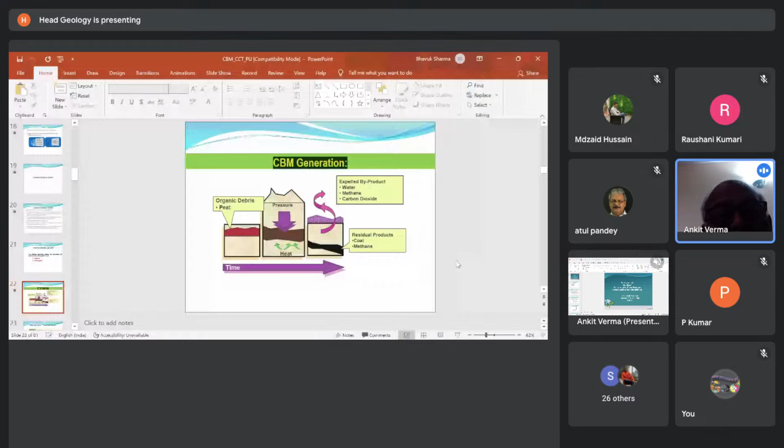There are two processes which control the generation of methane: one is biogenic and the other is thermogenic. The biogenic process involves organic debris, and with heat, pressure, and temperature, the methane is generated and trapped.

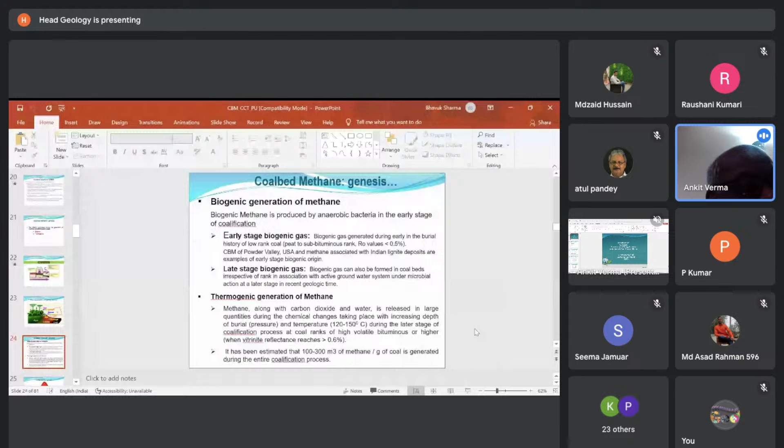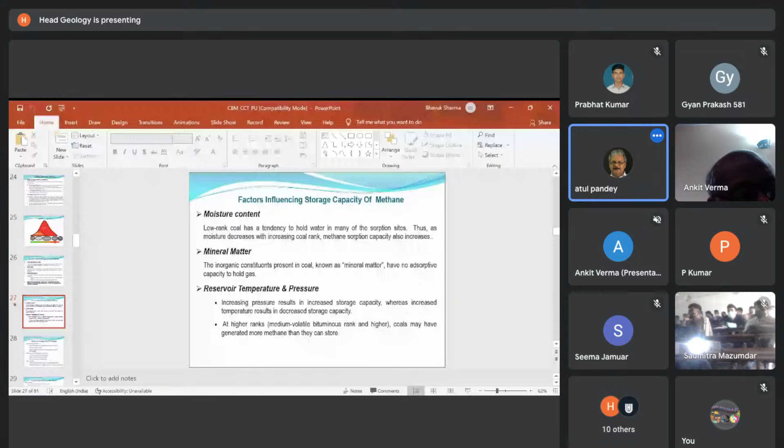The geological parameters important for parametric evaluation of a CBM project: the coal seams must have greater thickness, adequate depth of burial, lower degree of tectonic activity, and the chemical and petrographic parameters are also important. It must be low moisture and low ash coal, high carbon percentage, vitrinite rich, and the rank should be medium volatile bituminous to low volatile bituminous.

When we do the parametric evaluation, we measure the gas content. There is a specific process to measure the gas content, to know the actual quantum of gas present.

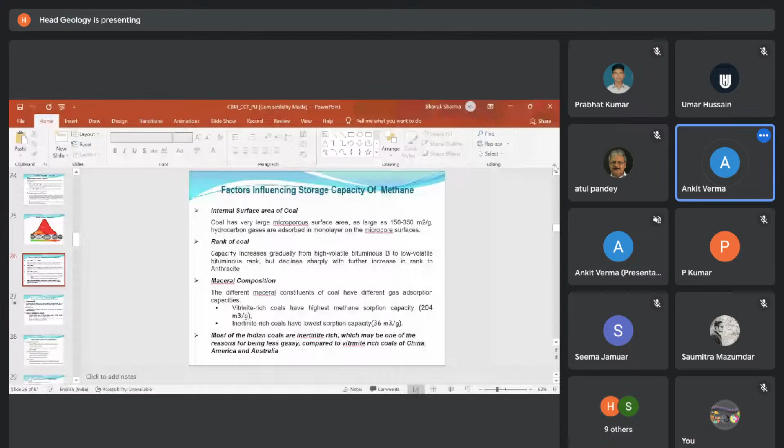Hydrogeology is very important; permeability is very important. So now, when we do all these parametric tests and parametric evaluation, we are in a position to say whether it is worthwhile for commercial harnessing of CBM.

We do a lot of parametric studies, which include geological studies, several tests, and geophysical studies, and then we are in a position to say that yes, this area could be earmarked as a possible area for extraction of methane. I will repeat, I'm sorry because of the slide issues - there is a slight break in the presentation, but these are very capital intensive projects.

They are capital and high technology projects. They could not be taken up unless a complete parametric evaluation is met, and we are sure that we are going to get a good quantum of gas extracted from the marked areas. For such assessment, there are several software, like the Comet series of software, which could give a lot of inputs for taking commercial decisions.

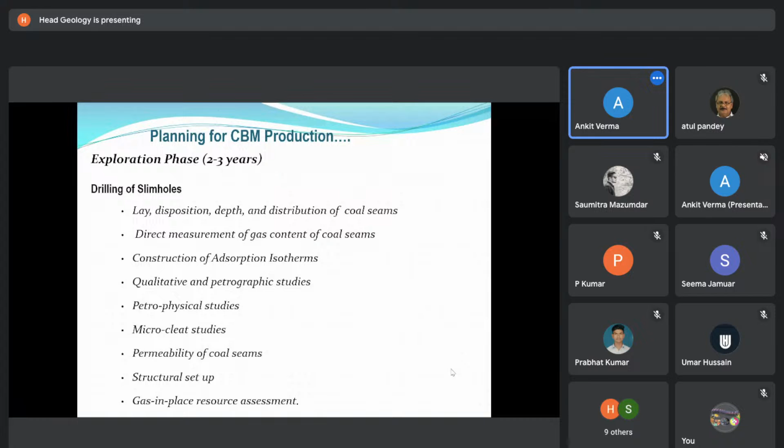After drilling the slim holes, we go in for the pilot phase. In the pilot phase, we do real term CBM wells drilled, and we test at the pilot scale, which decides the producibility and recoverability of the reserves by simulating data generated during exploration phase using software.

Fairways, which indicate which area would be a better source for CBM extraction, are also located. In this stage, we also carry out the market survey.

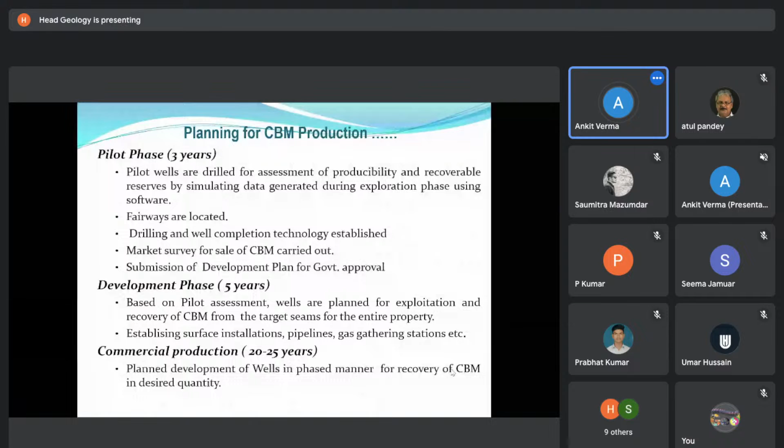In the next slide, you will see the hydrofracturing unit working. So to lower the strata pressure, we do a lot of dewatering, and dewatering facilitates the CBM.

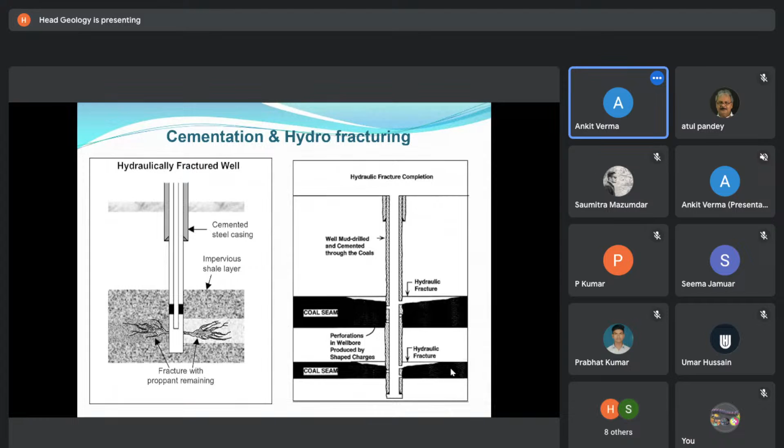Yes, it's visible, audio is also clear. But slide is visible and audio is also clear. There is some technical problem. Okay, doesn't matter, I'll handle it for some time.

This is one of the techniques. I'm not going into detail on that. There are several technologies. This is when one source has three or four coal seams spread out.

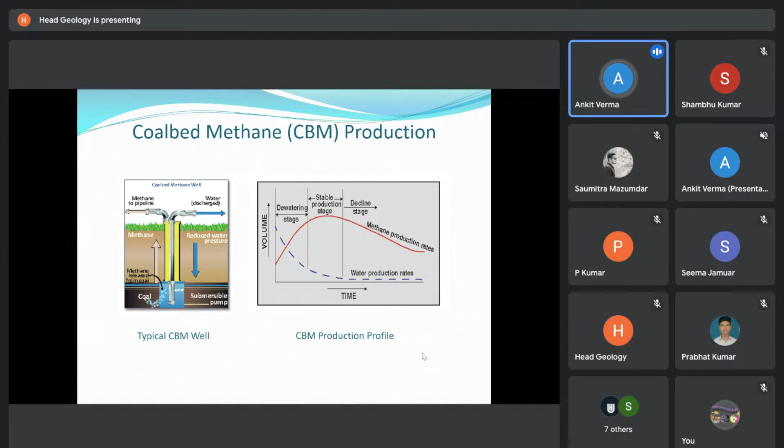which, going by the conversion as far as electricity generation is concerned, 1 MMSCMD roughly produces about 220 megawatts. So India, as on date, is producing about 500 megawatts electricity equivalent from a resource which would have otherwise been wasted. Next, please.

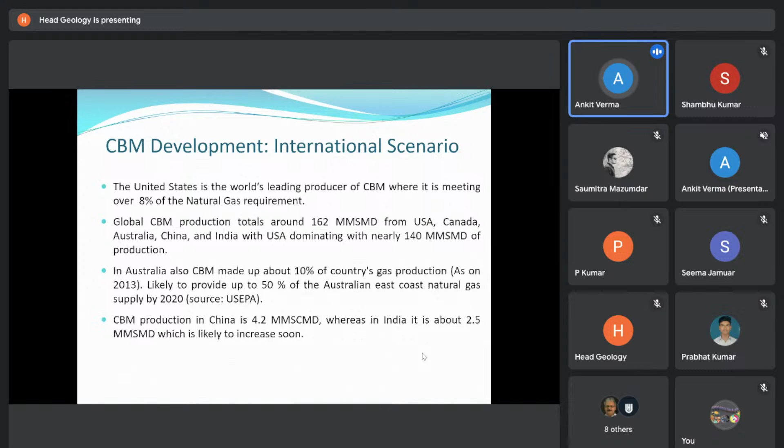How India got into it? We started CBM related studies in the early 90s, and I'm very happy to share with you that it was started in CMPDI under the leadership of an alumni of Patna University. CBM policy was put in place, announced in 1997. And consequent to the CBM policy, the guidelines were there on how to extract and harness CBM.

And the data dossiers of the prospective blocks were made by CMPDI. We prepared data dossiers on CBM prospective blocks. 33 such CBM blocks were allotted through global international bidding. These dossiers were appreciated. Next, please.

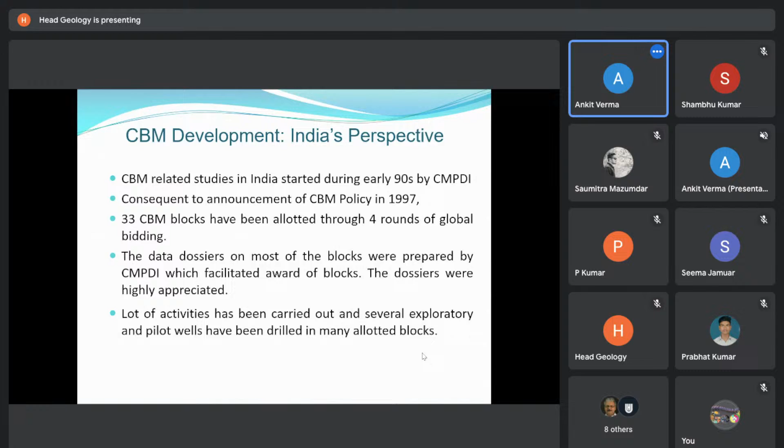US EPA, the United States Environmental Protection Agency: CMPDI, Coal India and MOC work very closely with US EPA, and they have estimated that 1 billion cubic meters of methane is annually released from coal mining. We are producing about 0.8 billion tons of coal, and we are planning to increase it to meet our ever-increasing demand for electricity. So this will further increase the output of methane. Next, please.

Once you harness CMM ahead of coal mining, what is the advantage? There are several advantages. It ensures future mining is safe for gassy mines. When I say gassy mines, there is a very clear classification of which mine can be said gassy. And so they are designated in 3 categories: degree 1, degree 2, and degree 3.

When I say degree 1, then it is less than 1 cubic meter of gas per ton of coal mined. When I say degree 2, it is 1 to less than 10 cubic meter of gas per ton of coal mined. And when I say degree 3, it is more than 10 cubic meter of gas per ton of coal mined.

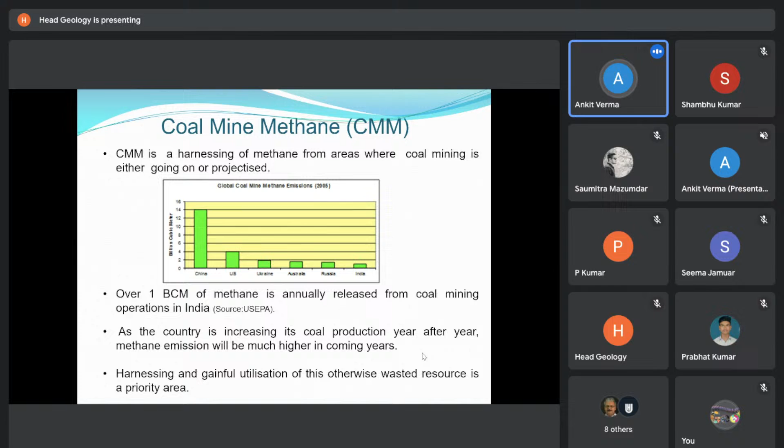As I told you, CBM and CMM production is challenging because of administrative challenges, technical challenges, safety and environment challenges. So whenever you go in for some project, challenges will always be there. But what is to be done is to meet the challenges, because we, from a geology background, want to ensure that every iota of resource is identified and gainfully utilized. That is our motto. We don't want to waste resources. So we are giving a lot of importance to developing these resources just to meet that motto of not wasting the resource. Next, please.

Already explained. So, ventilation air methane. As I told you in my initial slides, there was coal bed methane, coal mine methane, then ventilation air methane. I told you that we do not want to waste the resource. So what is ventilation air? When the underground coal mining operation is going on, we infuse a lot of air inside the mine, just to give fresh air for the persons working there.

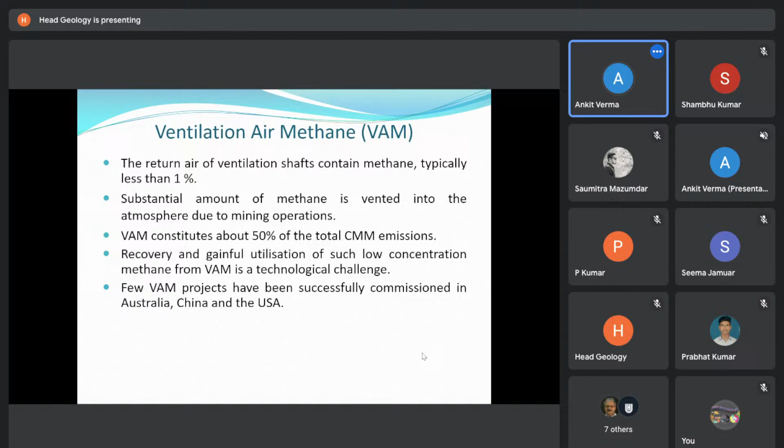This is the advanced method of doing UCG, where directional drilling in coal seams and controlled injection of oxidants are used. It's called the CRIP method, controlled retracting injection point. This is also utilized. Next, please. As in case of CBM, CMM, VAM, etc., India is not very far behind in taking up UCG, even at the concept level. Why UCG in India? Because our coals are low ranking. Some of the coals are isolated where mining is just not possible with the present economics. These coal seams, isolated in nature, lying at great depth, are the ideal source for taking up UCG.

Just imagine, in the 1980s we thought of carrying out UCG under a collaborative regime with the USSR. A lot of data were generated in the Merta Road lignite deposit of Rajasthan. CMPDI was generating data. The place was found suitable for taking up UCG. But there was great concern, correct or incorrect, I will not make any comment, about the environmental factors and contamination of groundwater, particularly. So the project, after finding it viable, could not proceed ahead. But now the technology is advanced, so we are in a better position to take up UCG, and that is what is presently being thought of. Next, please.

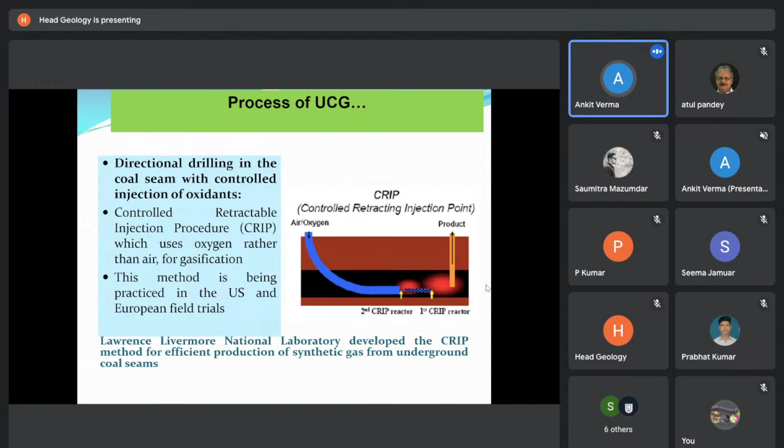Like in all other non-conventional coal-based clean energy sources, CMPDI has also taken a lot of steps. In fact, tenders were floated for selection of prospective bidders in the two identified blocks, but because of certain reasons it could not proceed further. And I can only say further actions are being taken, because in 2011 we had advanced and we had taken steps which were looking back